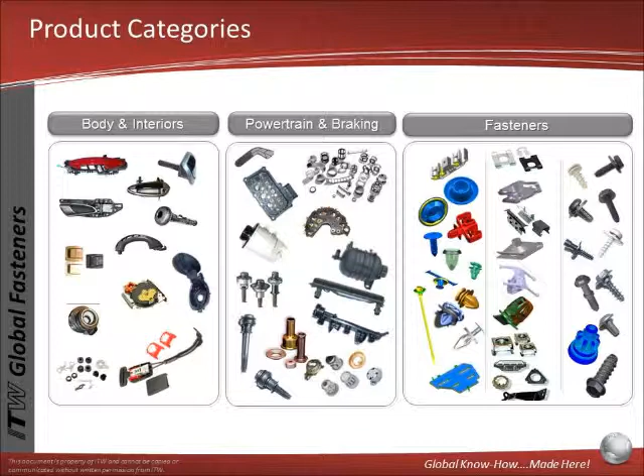Drilling a little deeper into our automotive segment, we make up about 13% of ITW, and we service almost all the OEMs and tiers around the world. Our global auto group services this $2 billion market with over 7,000 employees at 58 locations in over 20 different countries. Our primary automotive product categories include body and interiors, powertrain and braking, and then fasteners, both metal and plastic. Drilling yet a little deeper, you can see fastener operations alone exist in 14 different countries.

Now on to T-slot technology from ITW. So what exactly is T-slot technology? Well, this innovative fastening solution started on a project for a headliner application, but we realized there may be a lot of other uses for the idea.

T-slot technology utilizes a very common W-base style plastic fastener. There's not a lot new with respect to that, but what's truly different is the method with which we assemble and disassemble the fastener to the panel.

We use T-shaped holes in the primary panel. We use a common fastener to audibly attach to the narrow portion of the T-slot. The fastener has very good holding power in the narrow part of the slot, allowing for a robust system. When we're ready to remove, we utilize the wider portion of the T-slot by sliding the fastener to this space, and it simply drops out of the hole.

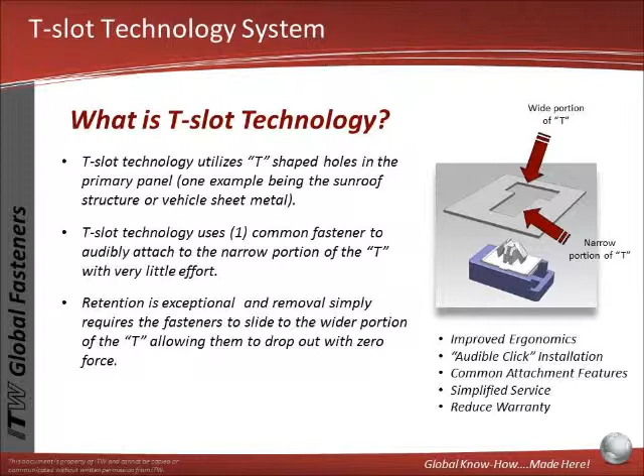In the headliner example, the benefits this provided were improved ergonomics, an audible click on install, common attachment features, simplified service, and a reduction in warranty.

Here's T-slot technology in action. You can see the W-base attach to the thin portion of the T-slot, and when ready for removal, it's slid towards the wider portion of the T-slot and simply drops out of the hole.

The fastener itself is a low insertion, high retention, standard W-base style fastener. It has nearly zero effort to remove, especially when slid to the wide end of the T-slot. We're able to use this common fastener for all locations.

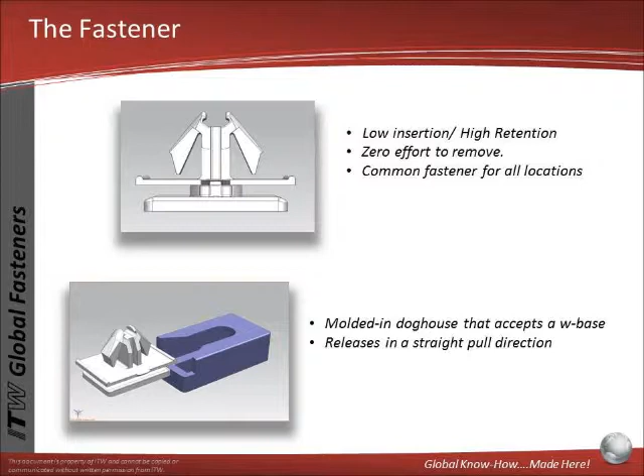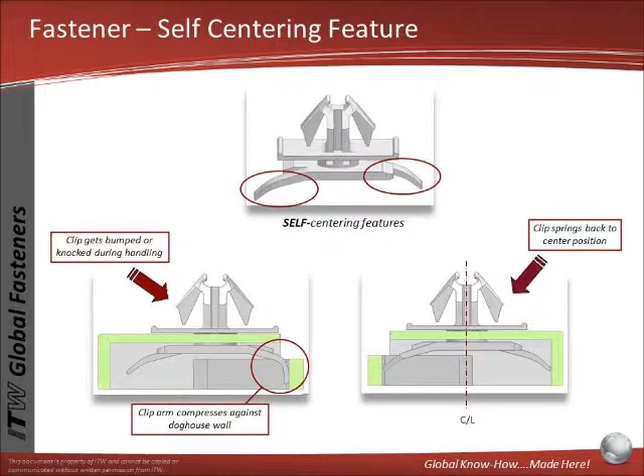It is most often assembled into a molded-in doghouse that releases with a straight pull out of the doghouse. An optional self-centering feature is also available. This allows the clip to be installed into a doghouse and be able to float back and forth plus or minus whatever tolerance we like, but always snapping back to the center line to help with alignment.

Next, I'd like to share with you how we adapted this idea to a headliner attachment. This system is great for headliners, especially those with sunroof or fixed glass. With headliners, you typically have some features that help locate the headliner to begin with. You have a number of hard attachments as well, such as the grab handles, overhead consoles, visors, and so on. The attachments around the headliner need to be strong because of the abuse they can take when the sunroof is open. The headliner is also a difficult piece typically to handle, and T-slot technology makes assembly a snap, literally.

Lastly, the removal is basically zero force. Once hard attachments are disassembled, you can slide the headliner out of the T-slots very easily. The next few slides go a little deeper into the specific headliner project that we utilize T-slot technology on.

Many headliners today are installed using a system called Dual-Lock. While this fastener has its advantages, we were able to overcome a lot of its disadvantages, like high insertion force, not knowing if the fastener is really engaged, an unacceptable failure rate where the customer was having adhesion separation, and ergonomic and medical claims.

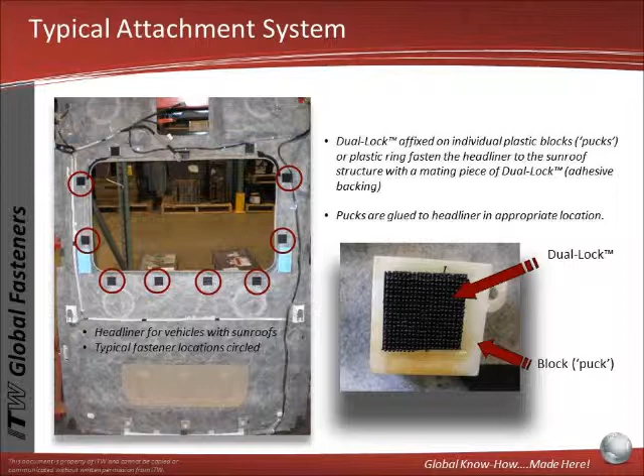Doing a comparison, you can see the benefits the T-slot technology has over common solutions. It has a much lower insertion force, provides an audible click and feel when engaging the fastener, and easily disengages from the T-slot, making headliner removal very easy.

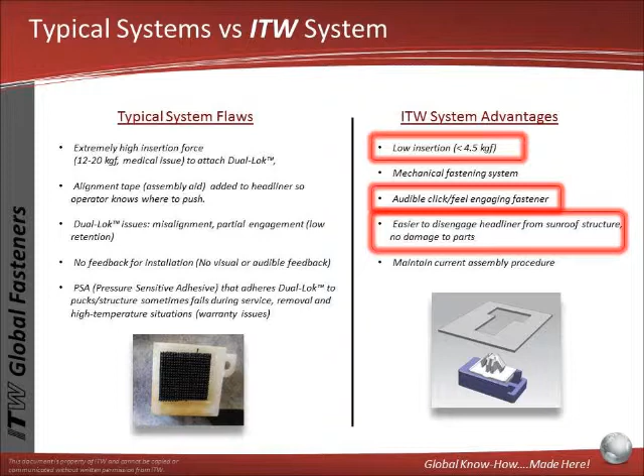Looking at a typical headliner installation, you can see in this picture, headliner is normally hooked or snapped into the front edge of the vehicle near the windshield, and then pushed upward and attached to the sunroof structure or the body roof.

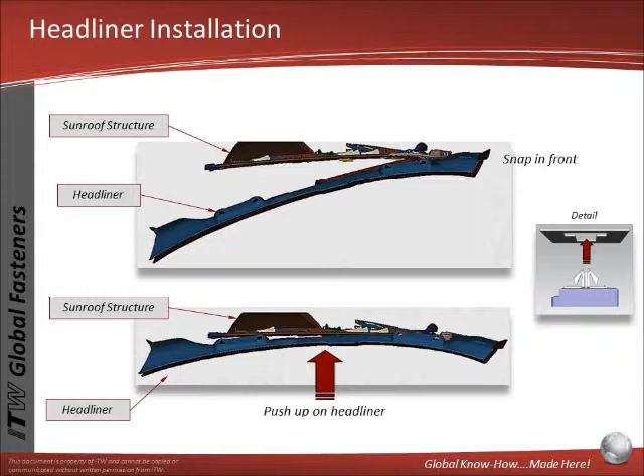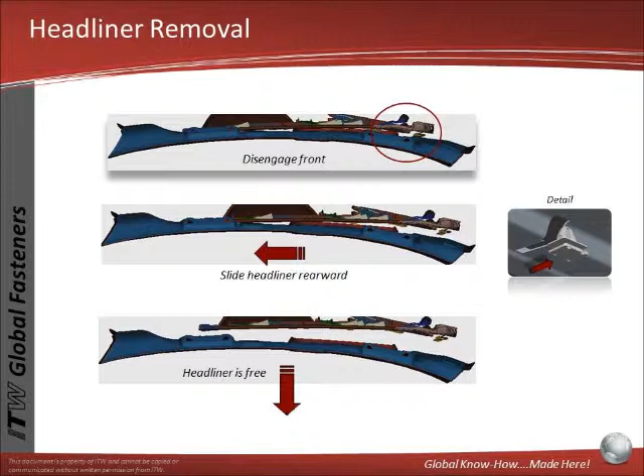The headliner removal is very easy. By disengaging the front, you can simply slide the headliner rearward and it will drop out of the T-slot holes.

An important point about T-slot technology, and one of the reasons it's such a good fit for headliner installations, is that it can be used on a number of substrates. Sunroof modulars are often multi-material components, and as long as you can provide a T-shape or open channel configuration, T-slot technology will work.

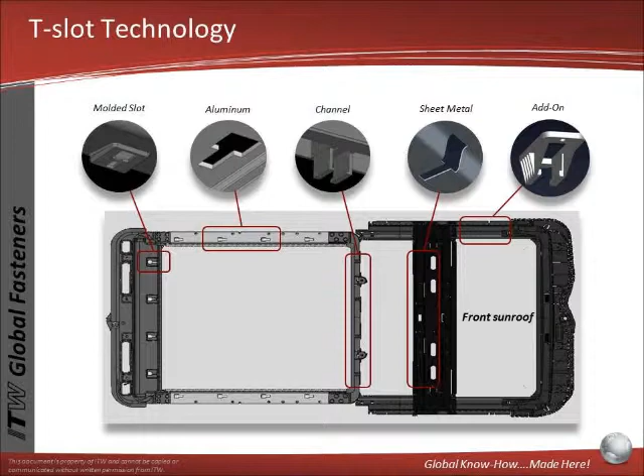At this point, I'd like to share a video that we put together to show you exactly how T-slot technology was used in this headliner application.